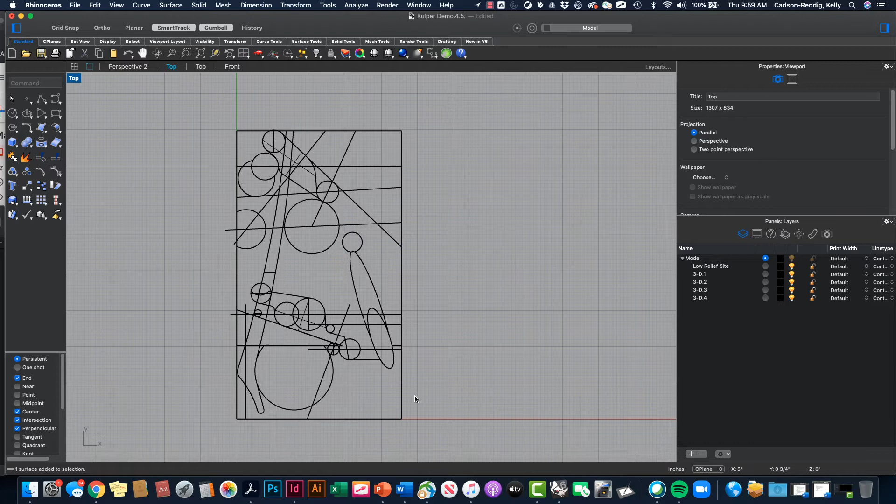Right now we've been always working in our model space at a full scale, but we are going to change the units. When we translate this and scale it up to a much larger size, working in inches will not make any sense. So let's begin by going to our file and our settings and changing the units. So I've selected units. For my model, instead of inches, I'm going to want feet. And I'm going to go ahead and choose to scale this object so that I know that my object remains the same size. If I didn't scale it, my object would change from being 8 inches tall to being 8 feet tall, which would be okay, but in this case, just for good practice, let's go ahead and scale it.

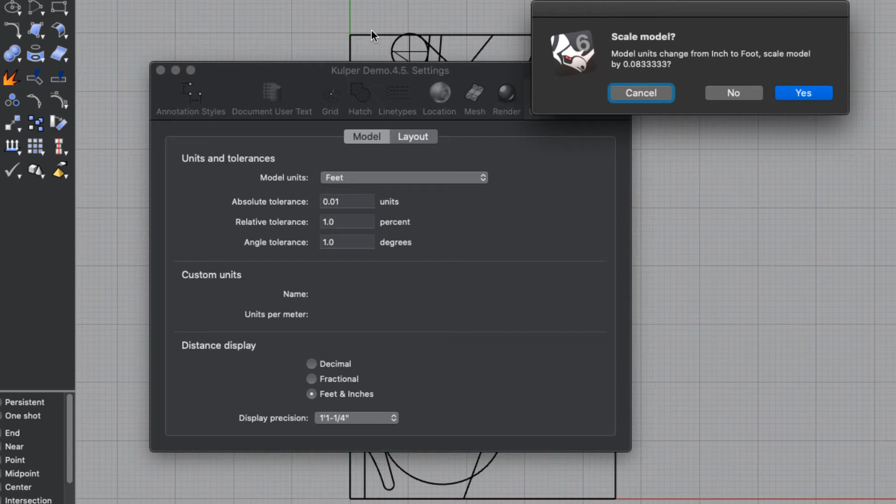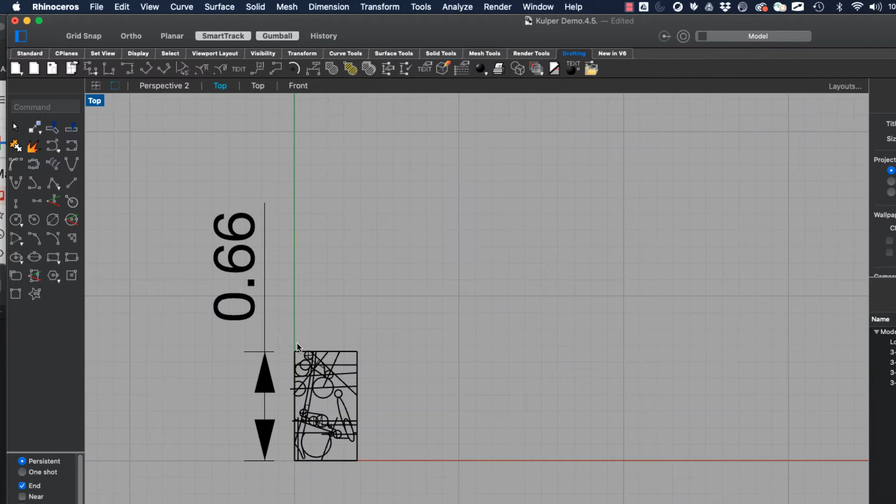For the layout, changing to feet, and again, I will accept the scale change. So now if I go to check the dimensions of my object, again with my drafting tools, you'll see now that my model is 0.66. So since I'm in feet, it's 2/3 of a foot, which is 8 inches. So my object scaled and stayed at the correct size. So let's go ahead and save just for good practice.

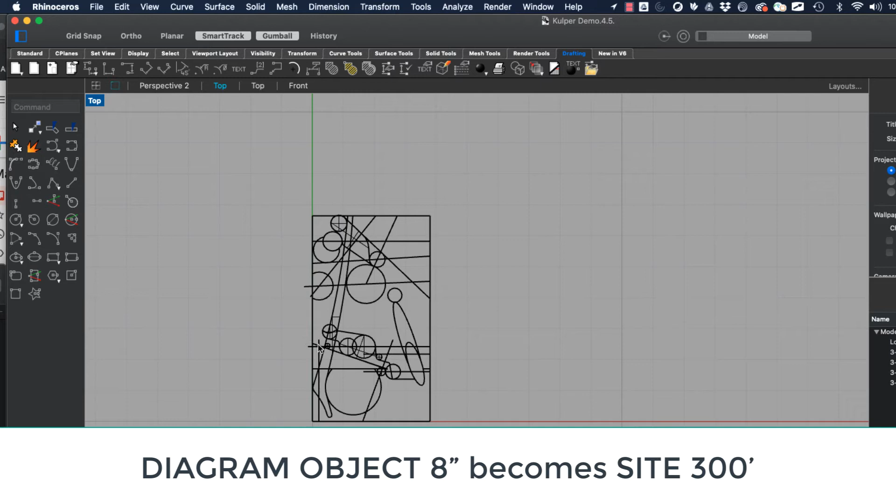The second thing I'm going to want you to do is now change the size. We've been thinking of this object as an 8-inch object, but we're going to begin to think of this object as a site. And so instead of 8 inches for the side dimension, I'm going to want that to be 300 feet. There's several ways to do this, but I'm going to just use the simple scale command. And I don't want the 1D or 2D. I want it to scale in all directions, so that's just simple scale.

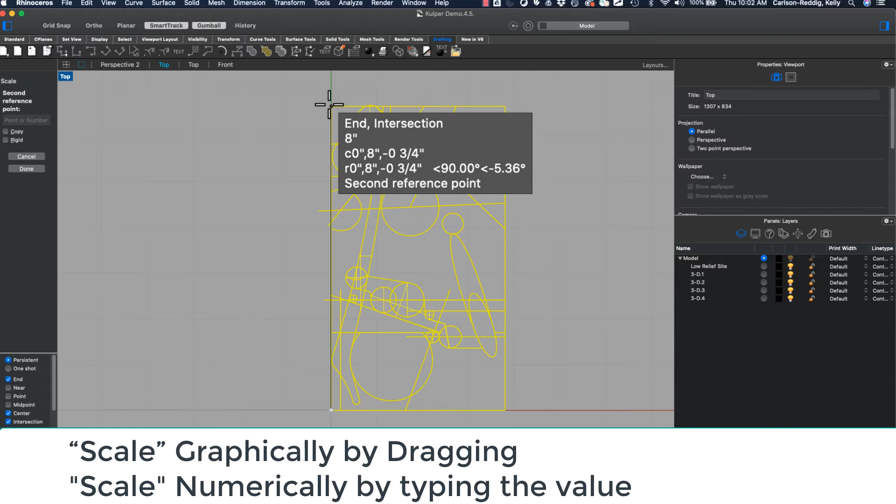I'm going to select my objects, hit enter. For my base point, I'm just going to go ahead and click on the corner of this. And for my second point, I'm going to click on the other corner. Okay, now it's waiting for me to do something. Let's type in a number. Since we're in the units of feet, I'm going to type in 300 and hit enter. If everything has gone well, that object, which was once 8 inches, should now be 300 feet. Let's check.

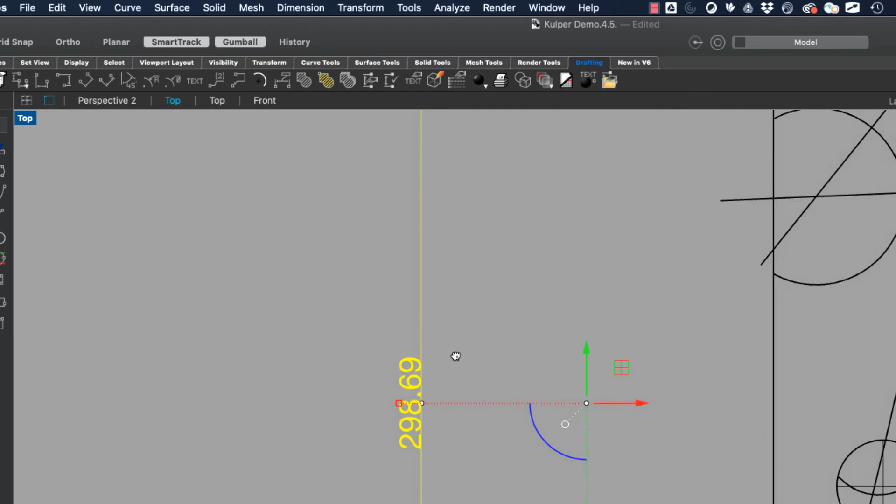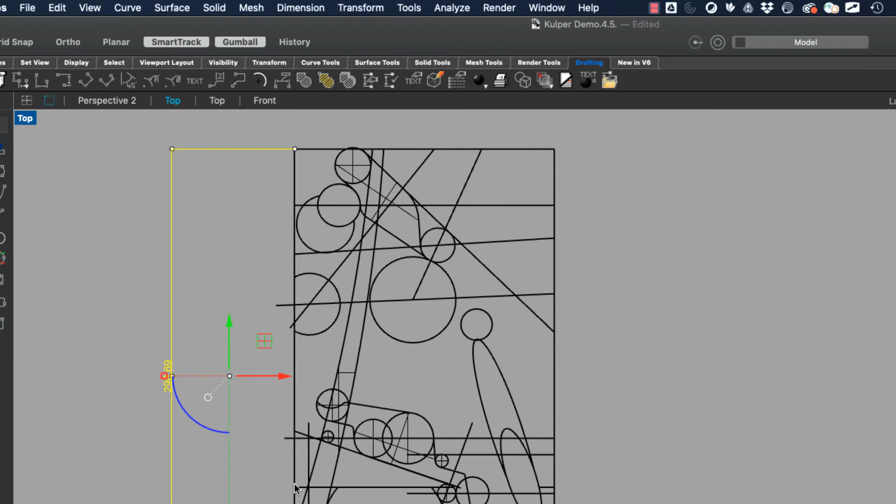So I think maybe in my scaling, I may have picked slightly off from my object, or maybe my object is twisted a little bit. But as long as I'm in the range, that's pretty darn close. That's going to be fine. Yours may come out precisely. Mine may be registering this tiny little drag here. But either way, I want you to have a model which is close to 300 feet. That's the first step.

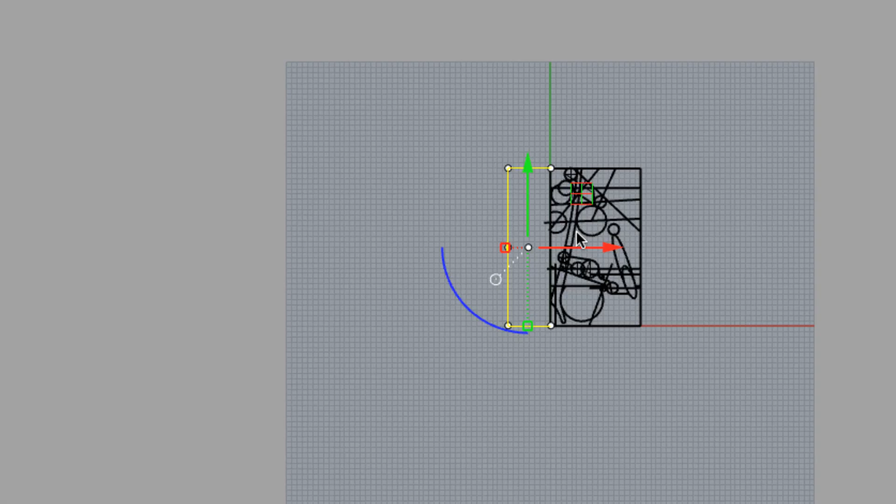And you'll see that my grid settings, the grid that I had set up when I was working on a much smaller model, is insufficient. Particularly if you're working with the grid a lot, go ahead and increase the grid units. If I want to take that step and increase the grid, it's in the same place under my file, my settings, and then if I go to my grid, you can see that my grid is very tight because I was working on a small object. I'm just going to say, give me a grid every 1 foot, major lines every 10 minor grid lines. So every 10 feet I'll have a major line, and if I have a 500 count grid, now I'm sort of back with a grid describing the space where my model lives.